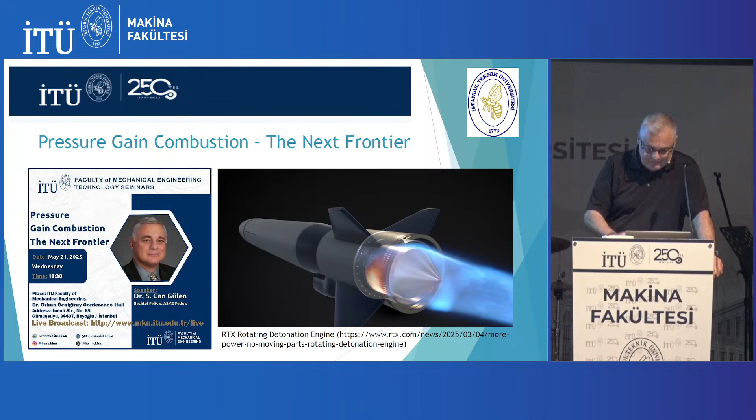So I will go through the theory a little bit. These are very complex systems, all gas turbines, steam turbines, electric power generation, jet engines, etc., etc., etc. They are sometimes mistakenly called heat engines, but they are not heat engines according to the theory. They are actually energy conversion devices. But the best way to understand such complicated machinery is using the ideal air standard heat engine cycles. They can give you 90% of the information that you need on anything when it comes to the application of a scientific theory to an actual piece of machinery.

Of course, now when you are saying heat engine, there should be a heat addition and heat rejection. As far as heat addition, there is no definition of it in an ideal cycle analysis, but when it comes to practical machinery, there is only one way to do it: combusting something, some fuel, combustion.

There are two types of combustion. One is constant pressure heat addition, ideal theory, which can be translated into practical application through deflagration combustion. Then there is constant volume heat addition, the second theoretical fundamental, which can be translated into reality through detonation or explosive combustion.

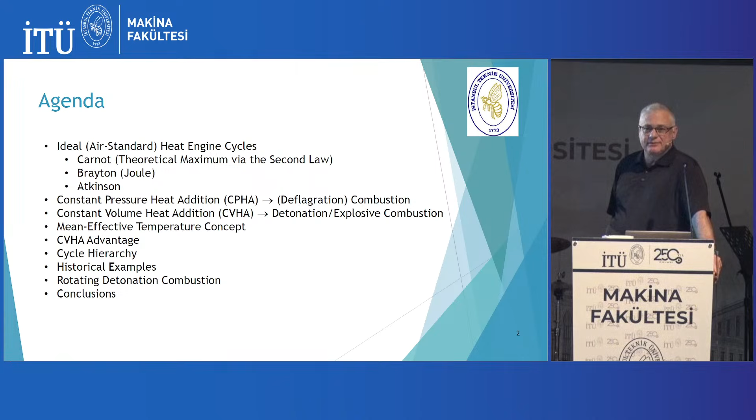Aurel Stodola. Why did these people come up with these ideas, try it, build it, run it, but went nowhere?

If you understand that, you understand the challenges, and then you come and look at the 2020s and say, okay, why can't we look at it again? Is there a point in looking at it again? Do we know something now that we didn't know then? I can answer that: no. In fact, if anything, today we know less than those greats of engineering knew at the end of the 19th century. Less. We know less.

But as far as the technology—especially materials technology, manufacturing technology, computational fluid dynamics—of course we are light years ahead. And that makes something possible. Those guys thought about it but couldn't do it. Now, sometimes we are rediscovering it again, but now we can do a little better.

Then I will talk about rotating detonation combustion, which is the final step in pressure gain combustion today. Its importance is that it's more applicable to aircraft propulsion, and especially rocket propulsion, to achieve hypersonic speeds. That's why the interest is there. But it can also be applied to land-based gas turbines for electric power generation.

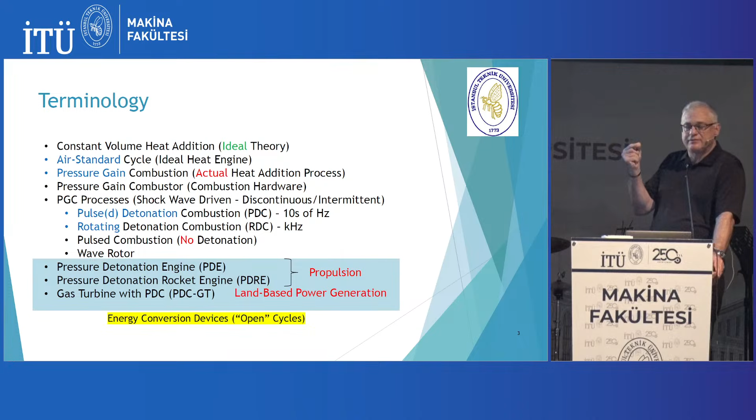Pressure gain combustion, or PGC, is a shock wave driven process. It's discontinuous and intermittent, because think about fluid dynamics and the Bernoulli equation. How can you have a flow system where pressure increases? Impossible, right? Well, there's only one possibility—refer to the gas dynamics part of fluid dynamics. A standing shock wave is the only means to have a flow with pressure increase.

Now, there are different mechanisms of pressure gain combustion. Number one is pulse detonation combustion. It's an intermittent process; the frequency is about tens of hertz, which means in one second you're having like 20, 30, 40, 60, 80 boom boom boom boom explosions. Rotating detonation combustion is an improvement on pulse detonation combustion because its intermittency frequency of creating those detonation waves is tens of kilohertz.

Okay, so it's a more smooth mechanism of achieving pressure gain and extra power. Now, there is something called pulsed combustion. The missing term is detonation.

That's something else—that's the World War II German V1 buzz bomb. I'll describe that. There's also something called a wave rotor that was brought up in the 1940s as a supercharger to be used with internal combustion piston cylinder engines. But today the interest is on pressure detonation engines, or pressure detonation rocket engines, for propulsion, and also gas turbines with pressure detonation or rotating detonation combustion for land-based power generation. Research is taking place on both fronts. Of course, the quote-unquote sexier one is rocket propulsion.

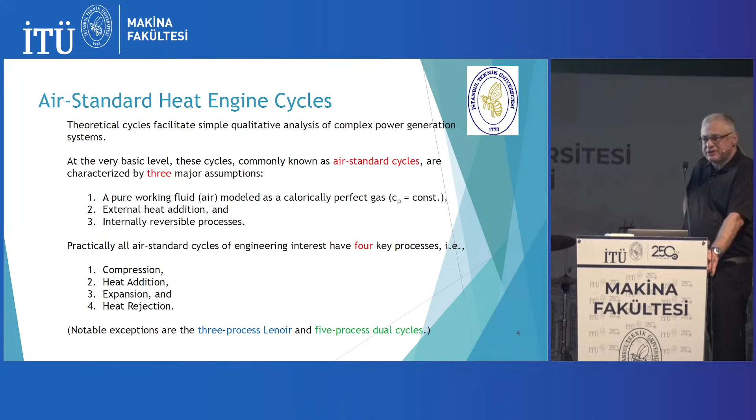There is one practical cycle, the Rankine steam cycle, where you have constant temperature heat addition. Why? Because of boiling—in the boiler you boil water, but that's only part of the total heat addition process in a steam boiler. So CTHA is of no interest for all practical purposes.

There are two other important heat addition mechanisms. One is constant pressure, CPHA, which is the basis of the Brayton cycle. The Brayton cycle is the underlying air standard cycle for gas turbines.

The other is constant volume heat addition, CVHA, which is the process in the Atkinson cycle. The Atkinson cycle is a special case of a piston cylinder internal combustion engine cycle, where the expansion stroke is extended to near ambient pressure.

There are car engines, still manufactured I think—Toyota or Mazda—based on the Atkinson cycle. So if no limit is imposed on the cycle pressure ratio, for a given cycle heat addition, the most efficient air standard cycle is the Atkinson cycle.

This is why piston cylinder internal combustion engines that we have today—not the ones in your car, but the ones produced by MAN or Wärtsilä firing natural gas to make power, 20 megawatt engines—have a cycle efficiency close to 50%. Today the best gas turbine cycle has an efficiency of around 43 to 44%.

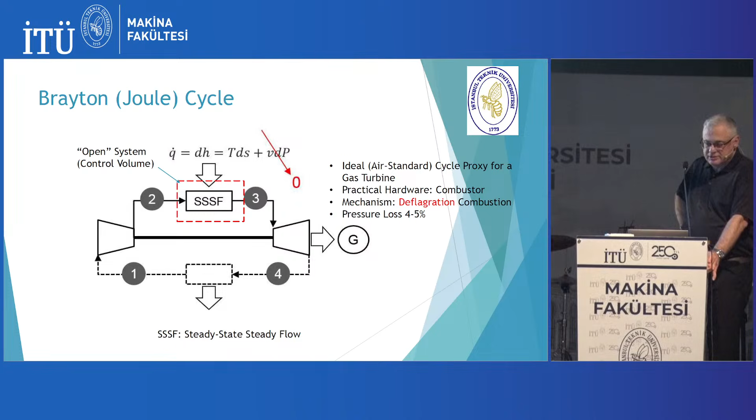The Humphrey cycle is the same as the Atkinson cycle. Humphrey in 1909 wrote a paper, which is quite interesting, called Internal Combustion Pump. And when you read the paper, which is not readable, if you spend the time and do the thermodynamic analysis on a temperature-entropy or pressure-volume diagram, it's identical to the Atkinson cycle.

Atkinson came up with that cycle named after him in 1882. That paper was published in 1909, and it's also wrong - I'll touch upon that a little bit. But anyway, here you have a constant volume process.

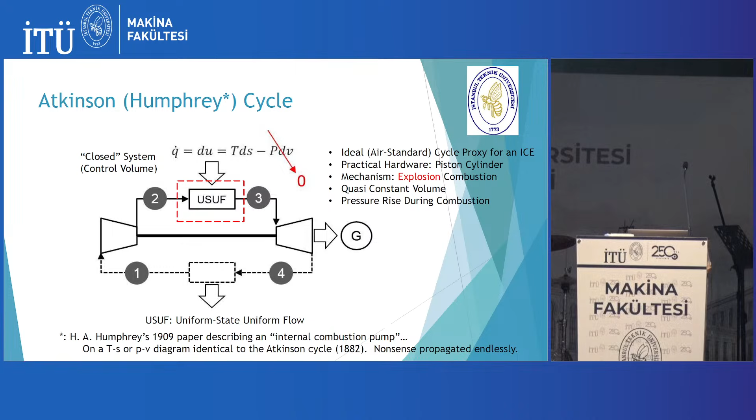Now if you have a constant volume process, and you're thinking about a gas turbine - here's the compressor, steady state, steady flow, it comes in, goes into the combustion system, which is taking place at constant volume, pressure goes up - how are we going to push that damn working fluid through that combustor?

You can't. So the process happening in the heat addition device of an Atkinson cycle - I don't want to call it a combustor - operates according to the principles of uniform state, uniform flow. It's basically a piston closed system, and by its nature it cannot happen continuously; it has to happen discontinuously, exactly what happens inside the engine of your car. So the Atkinson cycle is the air standard proxy for an internal combustion engine.

Practical hardware is the piston cylinder. The mechanism is explosion combustion - again, not detonation, explosion - so there's actually flame propagation there too, according to deflagration theory. It's quasi-constant volume, not exactly constant volume. And by the nature of the process taking place in a closed system, pressure rises during combustion - that's the efficiency advantage.

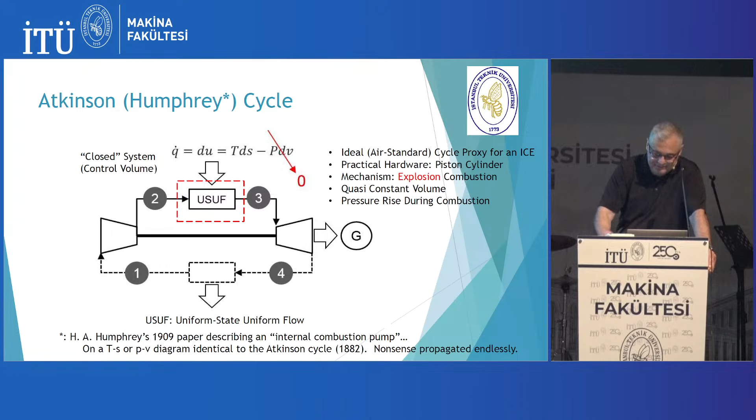Now what is the proxy for a gas turbine, which uses a steady state, steady flow heat addition device? Let's call it a combustor. Well, then the fundamental thermodynamic equation describing the process changes. It's not the Humphrey or Atkinson cycle, it's a different cycle, and I wrote a paper on it. Anyway, that's the ideal air standard proxy.

And that can take place in a device that's going to operate by necessity intermittently. Again, it's not the ideal constant volume process - it's quasi-constant volume. And again, the same thing happens: pressure rise during the combustion.

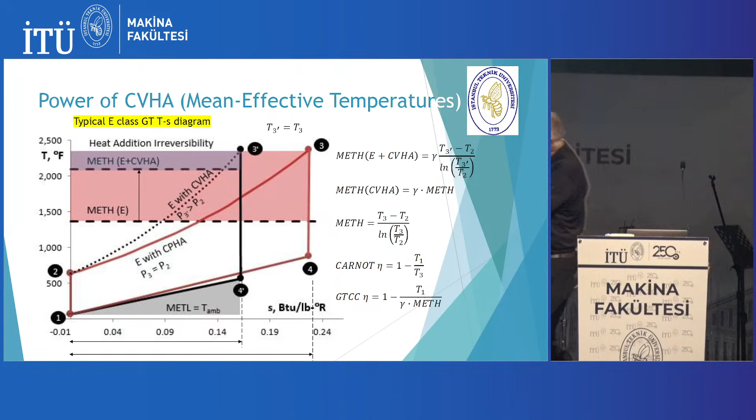So why is that important? Why are we breaking our heads over this? I don't expect you to understand this just by looking at it. Probably you won't understand it after I've described it either, but this is the fundamental thermodynamics. If you're interested in these things, this is the first thing you have to understand, so you have to work it out for yourself if this is of interest to you.

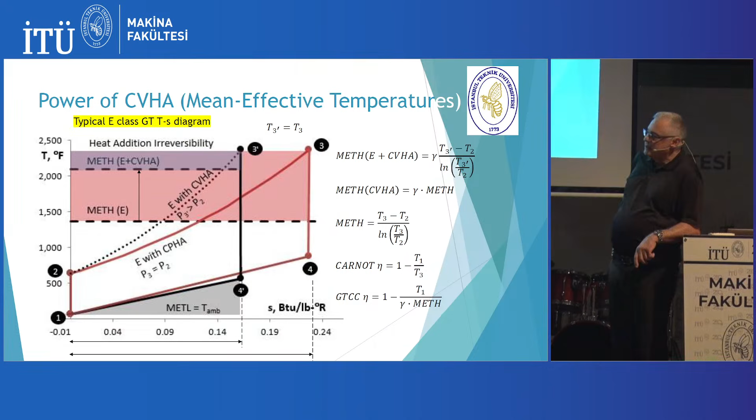So again, by the second law of thermodynamics, the maximum theoretical efficiency that you can get from a heat engine is described by a Carnot engine. The efficiency is very simple. Maybe you will remember this.

But as I said, in practice it's very, very difficult to build a cycle that's going to mimic the Carnot engine. All the engine cycles we have are poor attempts to approximate a Carnot cycle. Let's say a gas turbine. Gas turbine is a Brayton cycle. So the thermodynamic limit is 1.

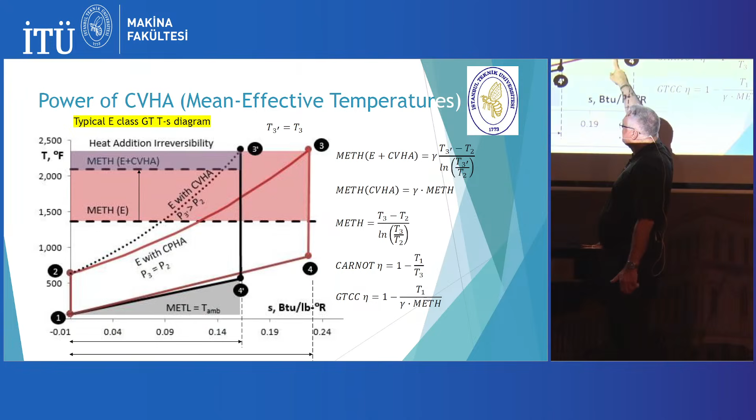Do I have the top of that? 3. And here, so that's square. That's the thermodynamic entitlement. This is the Brayton cycle for the gas turbine. You compress, transfer heat at constant pressure, and then you expand and reject heat at constant pressure again. So you can see that it is filling graphically only a fraction of the Carnot cycle area. So that's why that is the best that we can do.

But then you are looking at it and say, well, I want to analyze this cycle, but I want to stick to this formulation for the efficiency of that cycle: 1 maximum temperature, 1 minimum temperature, that's it.

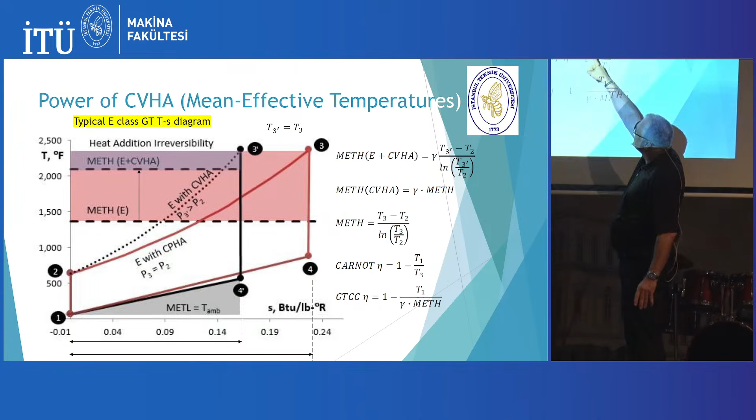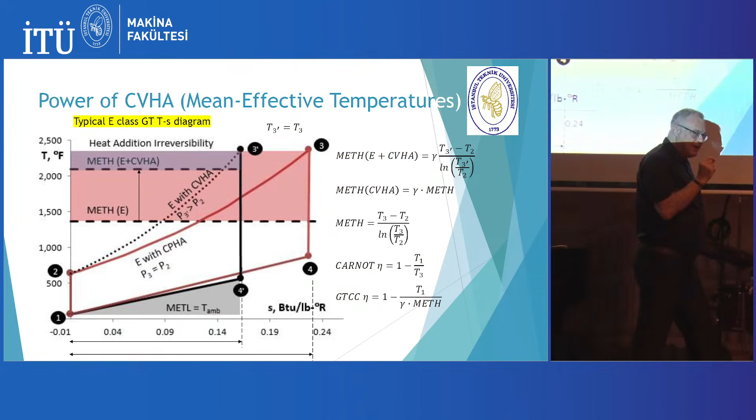If you want to do that, you have to calculate the mean effective temperature of the heat addition process. What does that mean? From 2 to 3, you are adding heat to the cycle and increasing the temperature from 2 to 3. But you can replace it by a hypothetical process with the same entropy change, but heat transfer taking place at an average temperature. That average temperature is this. It's a logarithmic average. It comes from the theory.

So therefore, if you look at your Brayton cycle, which is not even close graphically to a Carnot cycle, it becomes identical to a Carnot in shape. So then it tells you that in order to design a gas turbine cycle, you have 2 knobs: heat addition maximum temperature and the cycle pressure ratio. In order to design a cycle with the best possible efficiency closest to the underlying Carnot, what do you have to do? You have to increase that mean effective temperature of heat addition.

There are ways you can do it. Number 1, you can increase the cycle pressure ratio. If you do that, you can visualize even here that the Brayton cycle is going to basically compress. So the mean effective temperature is going to be, and also the mean effective low temperature, going to be very close to the isothermal limits of the Carnot.

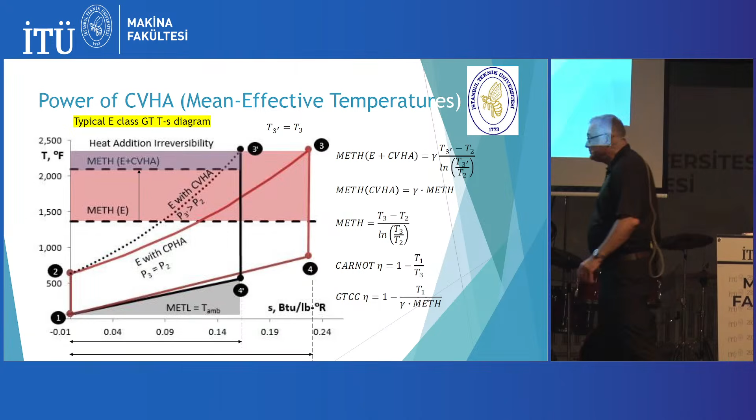Or you can have reheat heat addition, which I don't show here. And one other mechanism is pressure gain combustion. What do you do? You have the same compressor, but instead of a constant pressure heat addition, you go to constant volume heat addition. And you again target the same cycle maximum temperature.

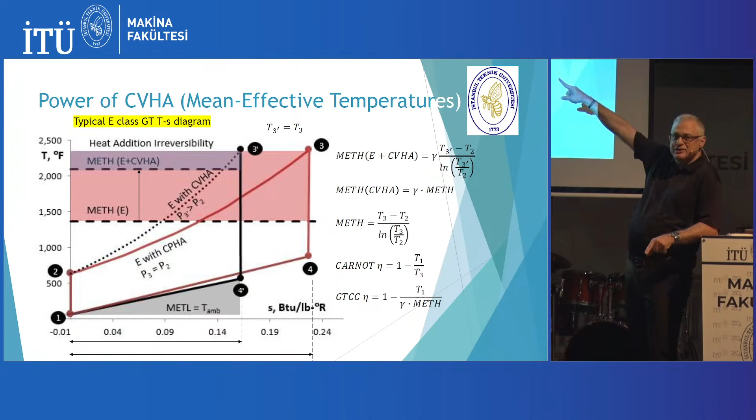But what happens now is, what did you do by doing that? On top of what you got from your compressor, you added pressure increase. So you have a much higher mean effective heat addition temperature now, which is much closer to the ideal Carnot limit. By doing that, you are increasing, on paper, on an ideal air standard basis, the efficiency of your cycle.

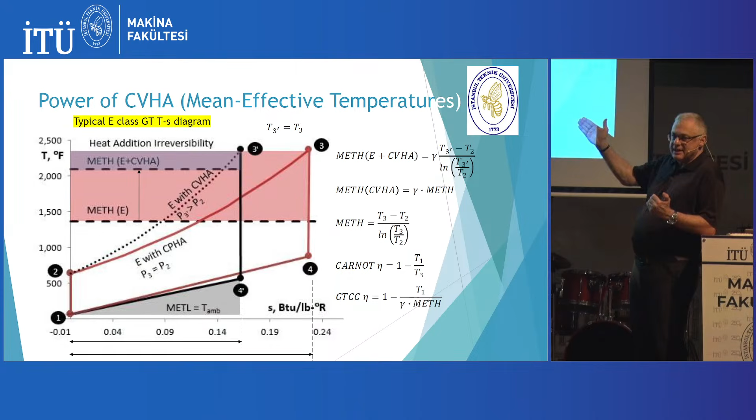So I'm not going to belabor this more, but in one sentence: pressure gain combustion increases the mean effective heat addition temperature of the cycle tremendously. Now, of course, in reality, you are not going to get that big bang for the buck with the hardware that you have, but I will show you some numbers. You can still get a very appreciable efficiency improvement.

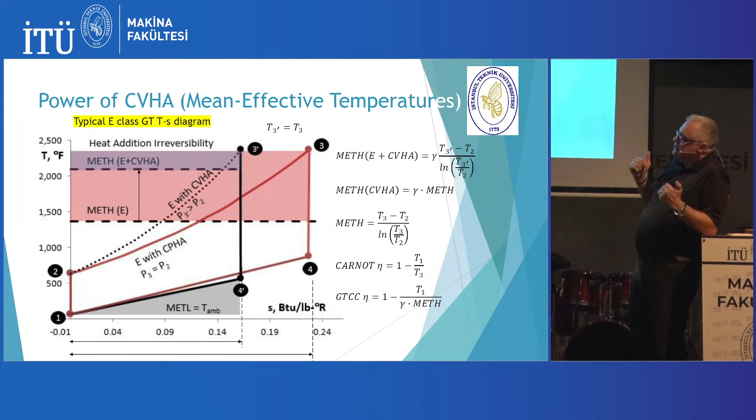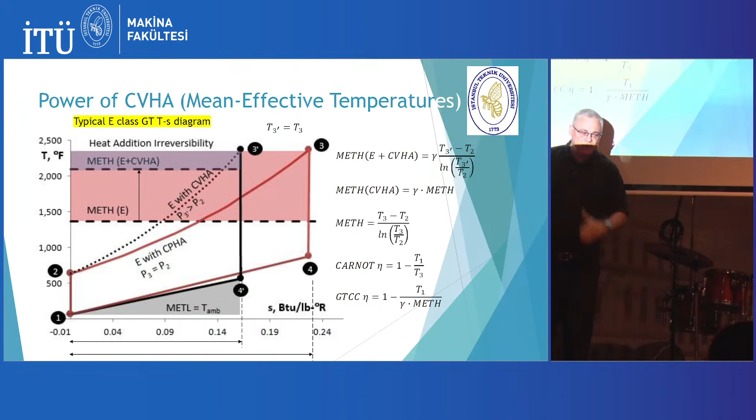So that's the driver. Another way to understand, graphically, at a very quick look, the advantage of constant volume heat addition is this reduction in the entropy generation. This is the original Brayton. This is, I don't know if you can see it, but constant volume heat addition. You reduce the entropy generation, and in layman's terms, if you reduce the entropy generation in any process, you increase the efficiency of it.

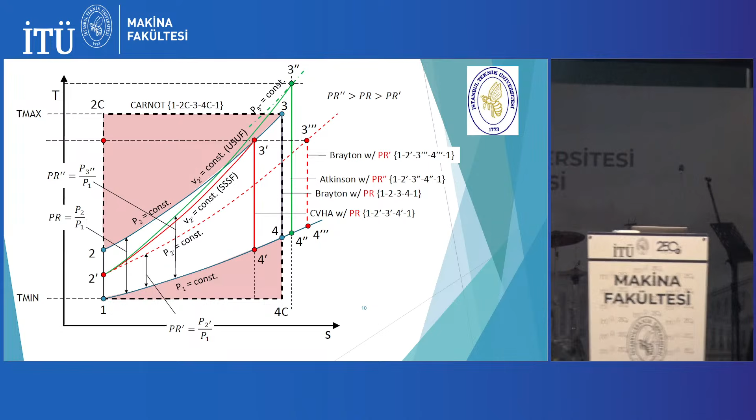So this is the cycle. Again, this is a very busy diagram. All I want to show here is, if you have a heat source or limit of heat addition determined by temperature at point 3, your maximum heat engine theoretical efficiency is that Carnot efficiency of that square. This is how the cycles stack up in terms of efficiency, how you can fill that box graphically.

Okay, and then the quick takeaway is that you have to either go with Atkinson or you have to go with CVHA.

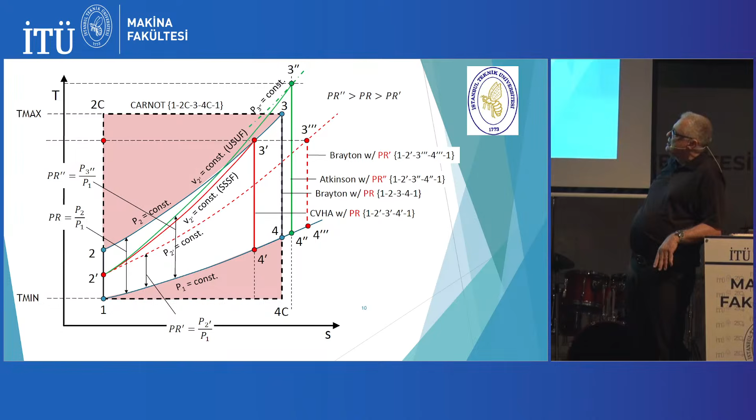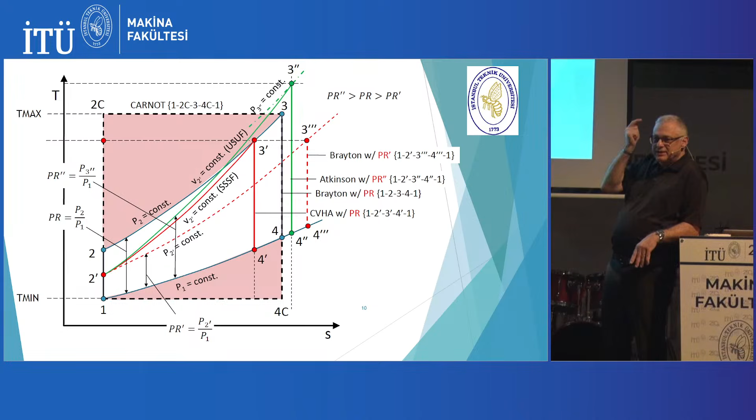Anyway, I put this here to illustrate that there is a lot of fundamental work, and to do these calculations, once you sit down and go through them, they are easy, especially with the ideal air standard assumption and the perfect gas. But you have to do these calculations not only formulaically, but also numerically, so that it hits you that this is what's happening. And I'm telling you, there are very, very few people today who can do this properly. It's a sad fact.

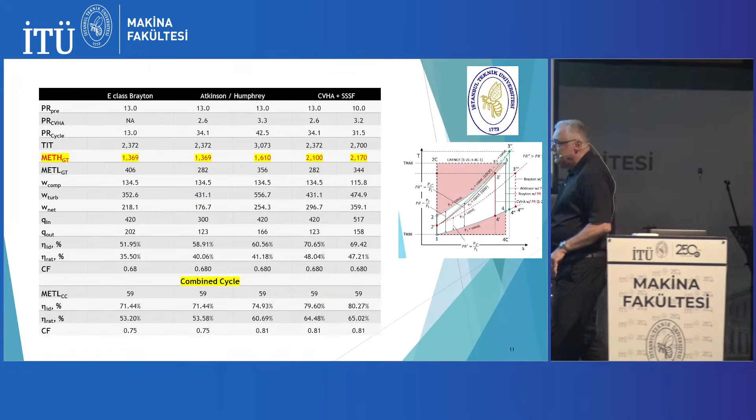So these are some numbers. E-class. Heavy-duty industrial gas turbines used for electric power generation are classified according to their turbine inlet temperatures. E-class is the old technology from the 1980s. In the 1990s, the technology evolved to F-class. E-class was around 1200, 1300 degrees Celsius turbine inlet temperature.

In the 1990s, General Electric first, and then all the other major OEMs, introduced F-class, 1400 degrees Celsius turbine inlet temperature. In early 2000s, GE introduced H-class with steam-cooled turbine, 1500 degrees Celsius. And in 2011, Mitsubishi introduced J-class with 1600 degrees Celsius turbine inlet temperature. So this is the classification.

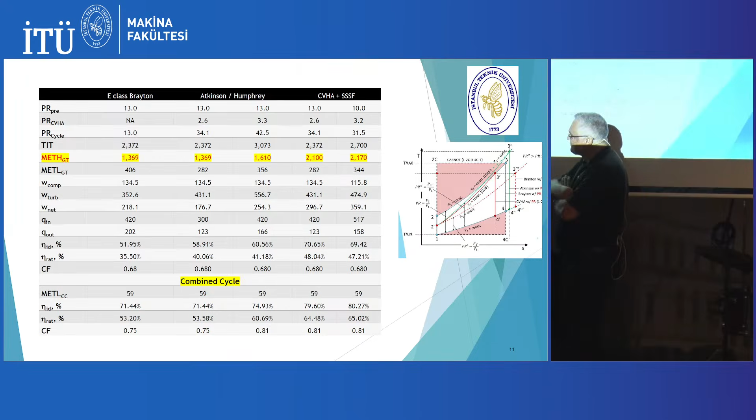So I use E-class as an example, which is an archaic technology. It's still being used. It's a workhorse, very mature technology, very dependable technology. It's actually used widely in syngas applications, refinery applications. It has low efficiency, but it can be improved tremendously with pressure gain combustion. So that simple cycle is about 35.5% efficiency, nothing to write home about.

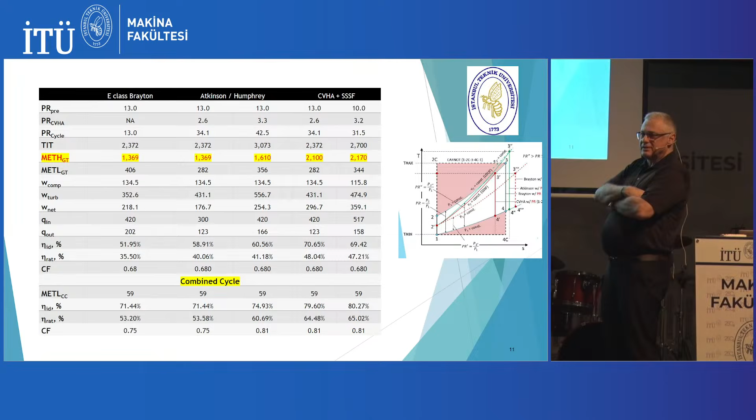As I said, modern machines today can reach 44%. And if you do a combined cycle—anybody need help with the combined cycle theory? Okay, well, let's do it. I don't know, it's included in the price of admission.

So if you look at that Brayton cycle, you see that triangular area that can be used to generate extra power. Instead of rejecting the heat of the exhaust gas at T4 to the ambient, you can use it in a boiler, called a heat recovery steam generator, to make steam, which you can use in a steam turbine to make additional power. From an ideal cycle analysis perspective, that 1, 2, 3, 4 Brayton cycle becomes 1, 2, 3, 4C and 1. So you cover a much larger portion of the original Carnot.

So if you do that, an E-class Brayton cycle, combined cycle, is 53.2%. These are rating numbers, so it's again, meh.

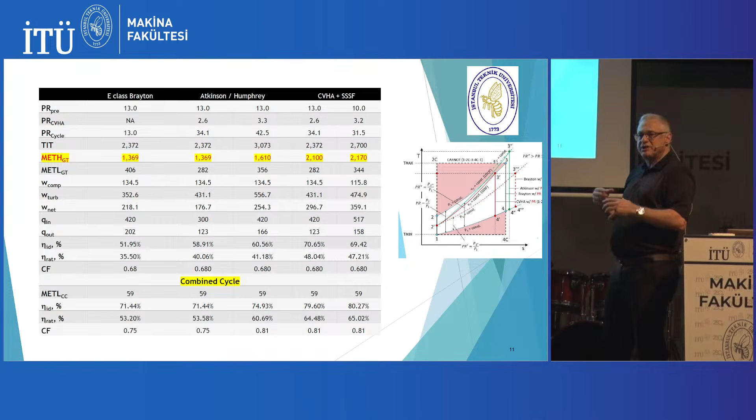So this is what you can do if you say, okay, I'm going to take away the combustor of that E-class gas turbine, and replace it with a pressure gain combustor. If you do that, and keep the same mean effective heat addition temperature, you're not getting much impact.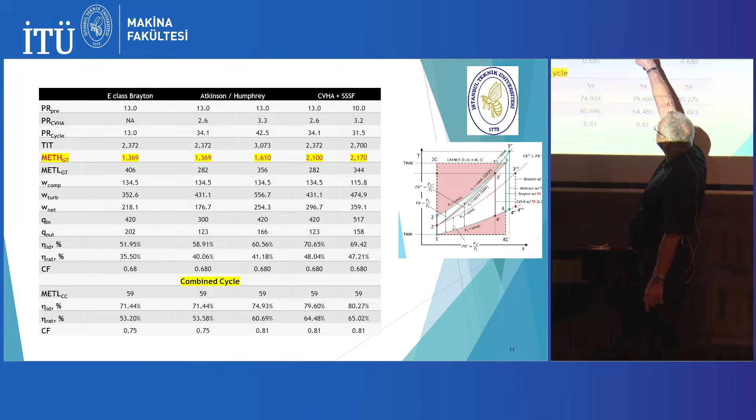But by doing the CVHA—oh by the way, look, TIT did not change. Now you change the TIT, use pressure gain combustion, your mean effective temperature is much higher. Now you get 60.7% efficiency. That's entitlement, okay? Which means this is the Humphrey, and this is the CVHA, even higher, if you can do it right.

And this is the Carnot factor. Carnot factor is the ratio of the actual ideal cycle to the Carnot cycle efficiency. That 0.75 is a very, very important number. Today in the energy field, especially in prime movers, that Carnot factor hovers around 0.75. So after one century of development, we've kind of hit a plateau. Whatever we do in terms of design, playing with pressure ratios and turbine inlet temperatures and whatnot, we are getting around 0.75.

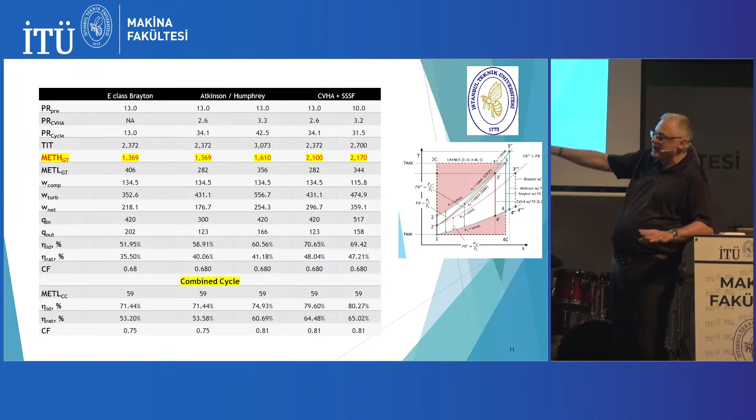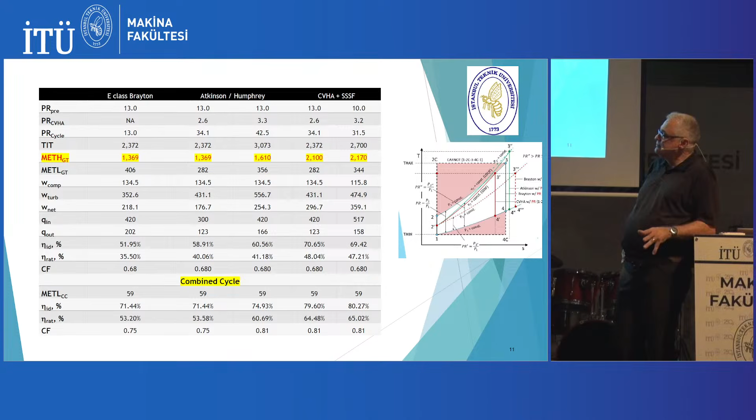And that's—the data is in my books and papers. I didn't publish it here, so if you're interested, you can look it up. I found out on my gas turbine engineering—my gas turbine book is available on Scribd as a PDF, free. People pirated it, so you can download it and look it up. Data is there. 0.75 is a very, very solid number.

So which means that as an engineer—and this is practically what I do—some mad inventor comes to you and says, 'Hey guys, I have this invention which is going to give you that efficiency.' Okay, you can immediately check it. So, what is your high cycle temperature? All right, if you had to build a Carnot engine...

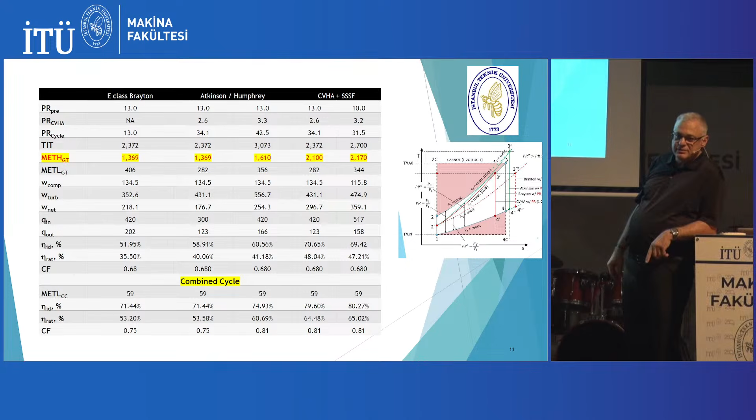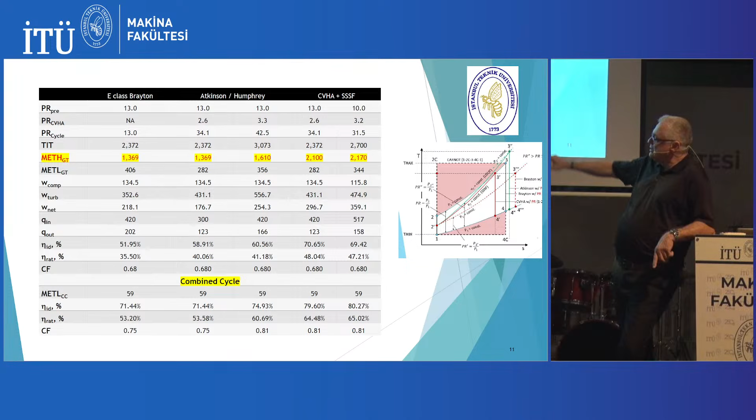Carnot engine—if you built it, and there are many who claim it, let's say you have done it. Multiply by 0.75, that gives you a very good estimate of what you can do with technology available today. This constant volume heat addition with steady state, steady flow system can give you a significant jump from 0.75 to 0.8, and the efficiency can hit 65. So the potential improvement is from 53 to 65, 12 points.

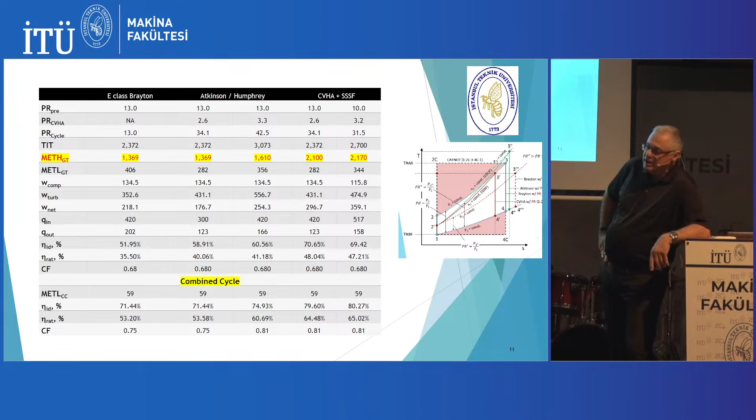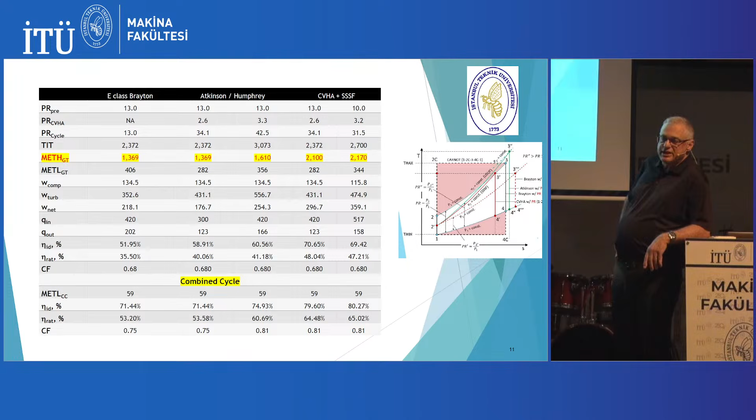The reality is, I'll show you. If you take all the non-idealities available in the hardware, maybe 3 or 4 percentage points, which is still huge. That's why pressure gain combustion, especially pulse detonation combustion in the 2000s, was quite hot and under investigation to improve the power generation cycle efficiency.

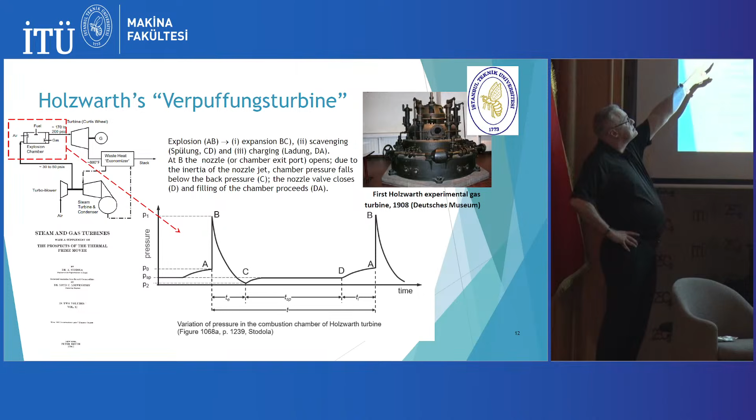Now, even more interesting, this is a combined cycle. 1905, 1908—the guy designed it. What do you do with the 800 degree Fahrenheit exhaust from that gas turbine? He took it, put it through a heat exchanger, made steam. That steam is sent through a steam turbine, and that steam turbine is driving that turbo blower. There is your combined cycle, 1905, 1908.

When did we start in the United States and Europe seriously pursuing combined cycles for electric power applications? Late 1960s. You see?

Now, can you find another Hans Holzwarth today? Not a chance. I told you, they can barely do four basic operations in math, that's all. I can today send this to all the universities in the United States and Europe—hey, take a look at this, describe to me what's happening here. I would say the successful reply rate wouldn't go beyond 10 to 15%. Well, anyway, the guy did it.

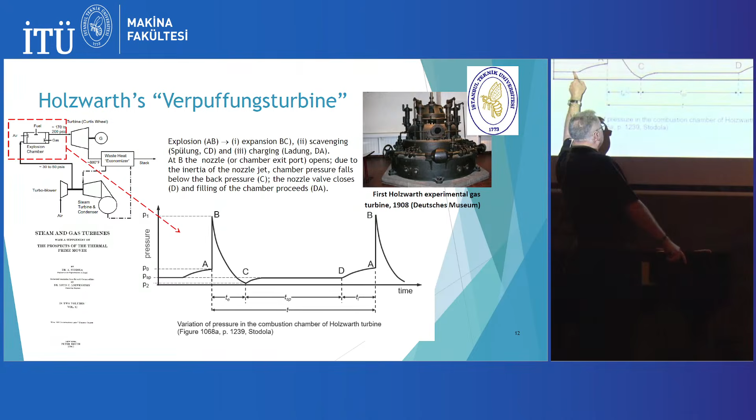And this is the intermittency. This process, by nature, is not continuous—compress, squeeze, close the valves, boom, open the valves, purge, repeat. So that frequency determines how well this intermittent process mimics a steady state process. You have to basically squeeze that time. If you do it like Holzwarth did, it's like poof, poof, poof. But if you improve on it and do it at a high frequency, it becomes continuous—that is pressure gain combustion.

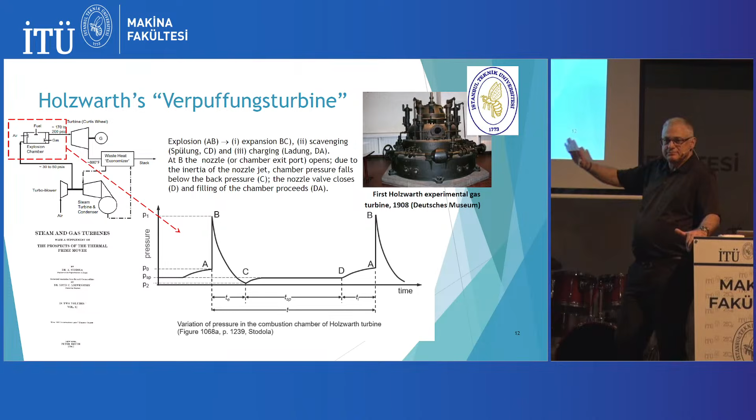1944, Germany is under attack. Russians are coming from the east, Americans from the west. Hitler is running out of men, and all the engineers and highly skilled technicians in German companies are called to fight on the Eastern Front. How are you going to protect those guys? Well, one way was coming up with bright ideas like these and making them work on that. Believe it or not, that was one of the main reasons behind German supremacy in wonder weapon production and development in the Second World War.

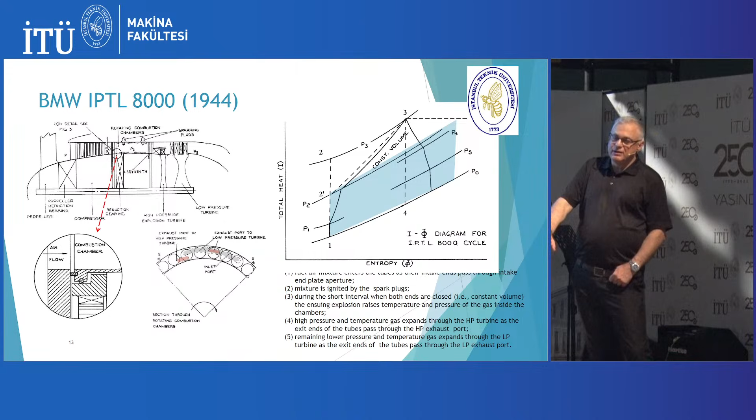Now, around the turn of the century, Germany was by far the most highly educated nation in the world—not even close, not even close to the rest. The country was teeming with Herr Professor Doctors, applied scientists, not run-of-the-mill engineers or garage tinkerers like Edison. Edison is nothing—he's a garage tinkerer and mostly a charlatan, but who was laborious and a good salesman.

And of course, if you try 10,000 stupidities, you are bound to hit something smart at some point. Germans were not like that. Everything came from the theory first, and then they came up with very interesting stuff.

The most well-known is maybe the first jet engine. They designed it, built it, and used it in the war. And then their Walter submarines. They even tried to put gas turbines into tanks, on which I am working on a book right now.

But the main thing under those crazy ideas was to keep the engineers working. And they were lucky, because Nazis were stupid and evil people, but especially Himmler. Himmler was fascinated by harebrained ideas of wonder weapons, and he took over the technological development under the aegis of the SS and created employment for these people.

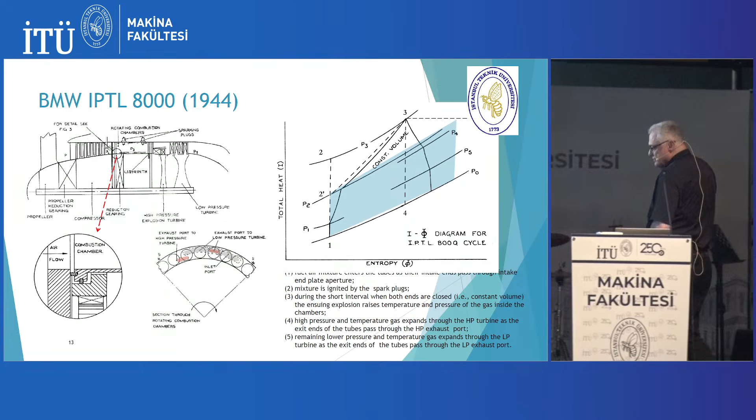And soon enough, of course, if you have so many Herr Professor Doctors who are very well versed in thermodynamics and stuff, okay? A German engineer from the 1940s, if you want to compare them with today's engineers, it's a laughing matter. It's not even a laughing matter. These guys are something. And they came up with this jet engine.

It is called IPTL 8000, developed at BMW, and it's basically a pressure gain combustion engine with a rotating combustor. And why rotating combustor and tubes? Because, how do you, this is an engine, a steady state, steady flow device, which is going to power an airplane. They want to increase the efficiency over what they have at that time.

The Jumo 004 engine of the Messerschmitt 262 was around 14% efficiency. With this one, they could get like 26% efficiency. I mean, beyond a quantum leap. And the theory is exactly the same that GE did in the 2000s, I will show you.

Rotating tubes, closing and opening valves synchronized with the rotation: the tube closes, ignition, detonation, combustion, valve opens due to the rotation, goes to the turbine, boom. The cycle is basically that CVHA cycle.

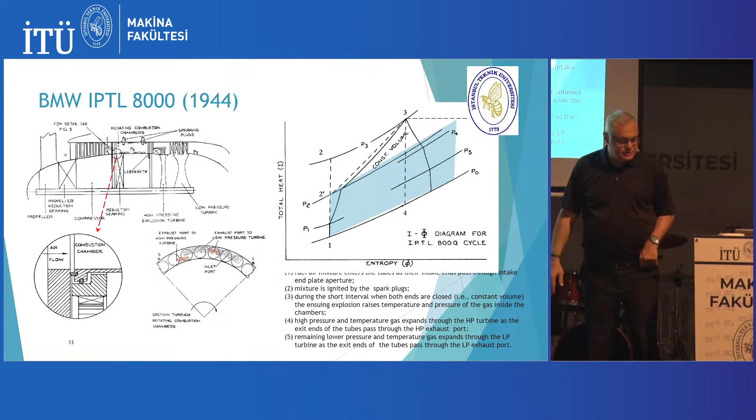And I did the calculations. It's in my book on German World War II superchargers, it's a very interesting book. If you are interested in those kinds of things, I describe it there also, did the calculations, and yeah, it holds. This is a 26% efficiency engine. By the end of the war, they were able to build the test stand, but they couldn't run it. Maybe they ran the combustion, but not the full engine, and then the Russians came.

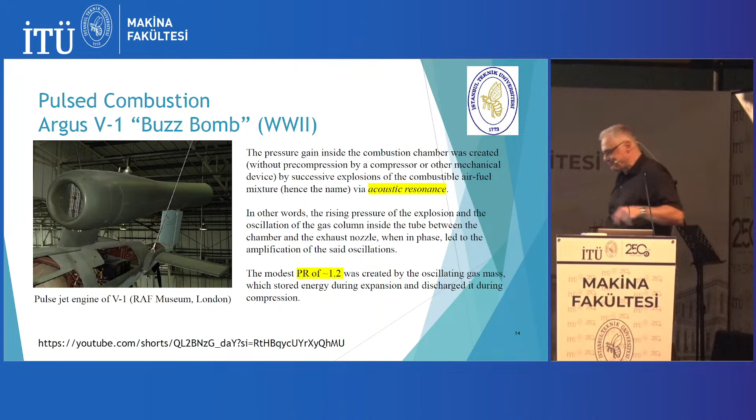And, I think they burned the documents and whatnot, so this is what's left. Now, this is pulsed combustion, not pulsed detonation combustion. I'm just going to describe it to you. This is the V1, the German V1 engine.

British know it as the buzz bomb. Why? Because of the noise it makes. Remember what did I tell you? Holzwarth's Verpuffungsturbine is what? Puff, puff, puff, low frequency.

In this one, the valves that you are seeing at the front of that engine open up very quickly, okay? So instead of puff, puff, puff, you have a rapid cycle, and on that machine, when it's flying and coming close to you, it makes that terrifying noise, and that's why they call it the buzz bomb.

What's happening here is basically valves are opening and closing, admitting air because the missile is flowing forward; air is coming in, fuel injected, valve closes, ignition, and then from the tube back, that hot gas is going and pushing the gas forward. The pressure ratio, pressure gain, is very modest, about 1.2, okay? Because the combustion inside that thing is not detonation combustion, it's still deflagration combustion.

And there's also this acoustic resonance that's happening in that place, in that room. It's a very simple engine. I highly encourage you to go to YouTube and look at modern V1 engine replicas to see how it operates. Very interesting. Just by watching them, you will understand many of these concepts, at least visually.

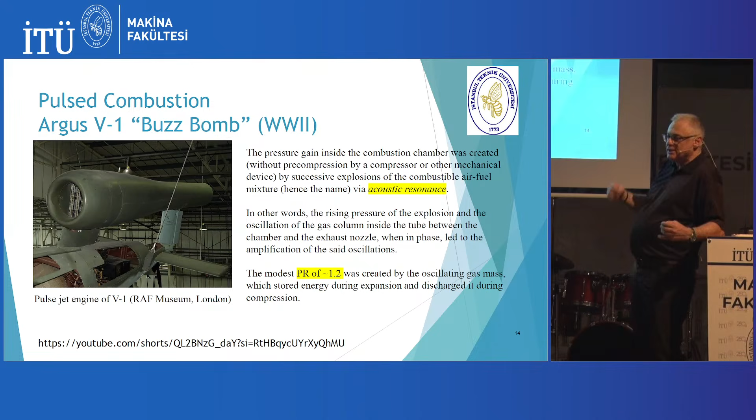Turbo compound engine, Napier Nomad. After the war, Americans and British, of course, they also developed their own jet engines to be used in military aircraft. Of course, Russians did also.

But even in the 5 years after the war, there is still a debate going on about which is going to be better, especially for military aircraft applications as a propulsion system, because there was one drawback of the gas turbines of the time: they were very, very inefficient, consumed a lot of fuel. So for a while, at least 10 years after the war, they looked at improving the fuel efficiency of the piston cylinder engines.

And one outcome of that was the Napier Nomad by the Brits. What's happening here is the main machine is a diesel engine, standard, but it's using this contraption here.

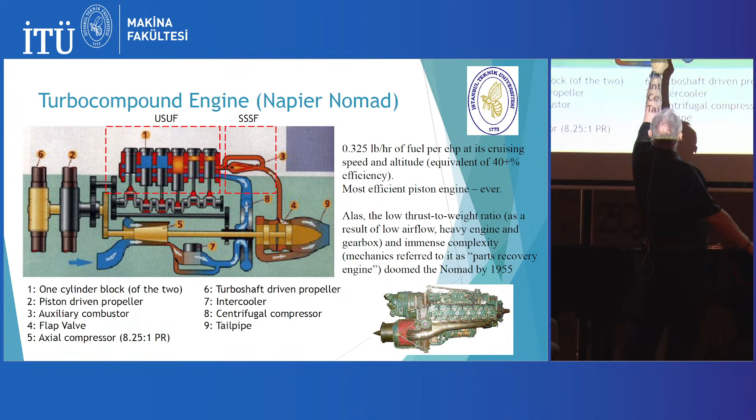Air coming in goes through an axial compressor, intercooler, centrifugal compressor, and that charged air is coming into the cylinder. So this is supercharging or turbocharging. Then high temperature gas coming out of the exhaust of the cylinder bank, instead of going out, goes through a second combustion chamber, number 3 over there, and then through a turbine, making extra power. So this is called turbo compounding.

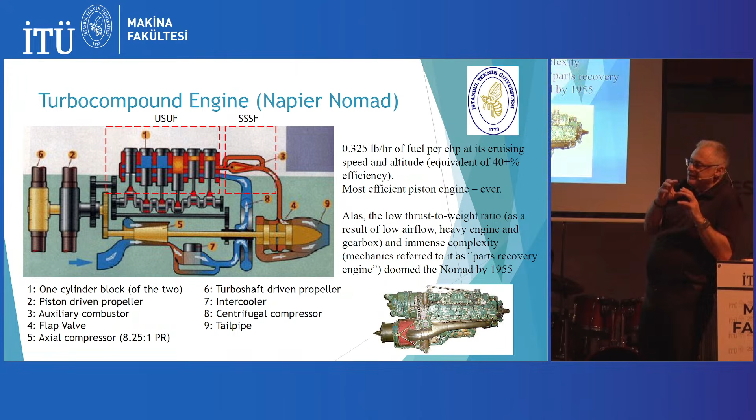It's also a way of increasing the cycle pressure with combustion. It was a very efficient engine, and actually it's still the most efficient piston engine ever, but it was very complicated and very heavy, and therefore it could not compete with the gas turbines, very lightweight engines. So it just died away, but the technology, turbo compound, you can look it up. I think it's still being used in some truck engines.

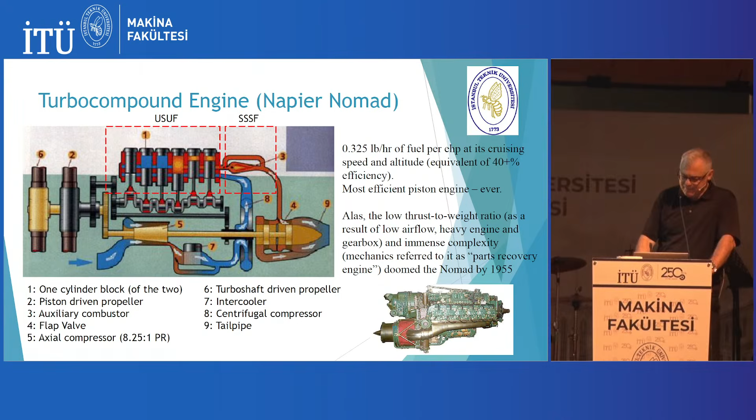Now there is also the wave rotor, known under the name of the Comprex, which was another way of supercharging piston cylinder engines. It is closer in spirit to detonation engines because the pressure addition to the charge air of the engine takes place in that rotating annular scheme, via shock waves and expansion waves.

Because just like that German BMW engine that I showed you, that thing is rotating in the middle - in this case no gas turbine, but in that case it was rotating between the compressor and turbine and creating that pressure by firing. Here it's again by the opening and closing of the valves, and for a moment both streams are trapped inside that rotating thing, from the hot, high-pressure gas to the low temperature, low-pressure charge air. Pressure is transferred through the shock waves.

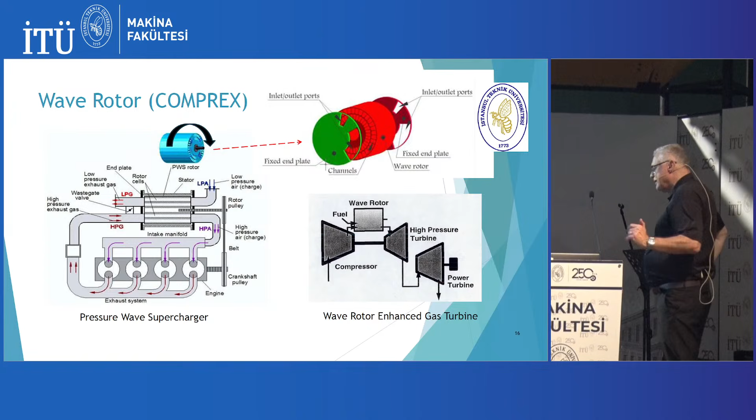So it has been tried, it has been applied. I think it's still being used, as I said - I'm not sure, Mazda or Toyota, you have to look it up. But that's another example of pressure gain, and it can be turned into a pressure gain combustor.

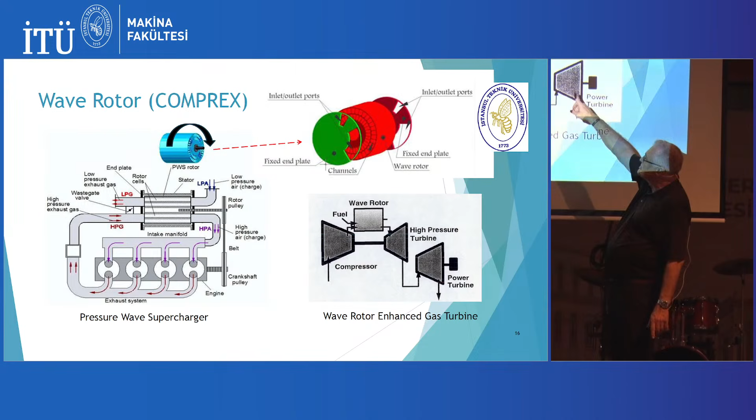So instead of this engine supercharging, you put the thing between the compressor and the turbine and inject fuel also inside and fire it inside that thing. So this is a wave rotor enhanced gas turbine idea. It didn't go anywhere because the pressure ratio, pressure increase of the wave rotor is also weak, so it doesn't give you that oomph that detonation can give.

GE, in the 2000s - this pulse detonation combustion idea goes back to the early 1950s with an interest in aircraft propulsion, but didn't go anywhere, was dropped. In 2000 again, especially with interest from military research agencies in the United States, they started looking at it, and GE looked at it, with an eye to application of this pulse detonation combustor to a gas turbine.

Tests were done, they were successful, but pulse detonation is a very, very difficult thing to do in aircraft engines because of vibrations. As I said, the frequency is very low, so it goes like bum, bum, bum, bum, bum, bum, bum. And it also has very detrimental impact on the turbine downstream because of that intermittent nature of the flow. But anyway, it was done and forgotten.

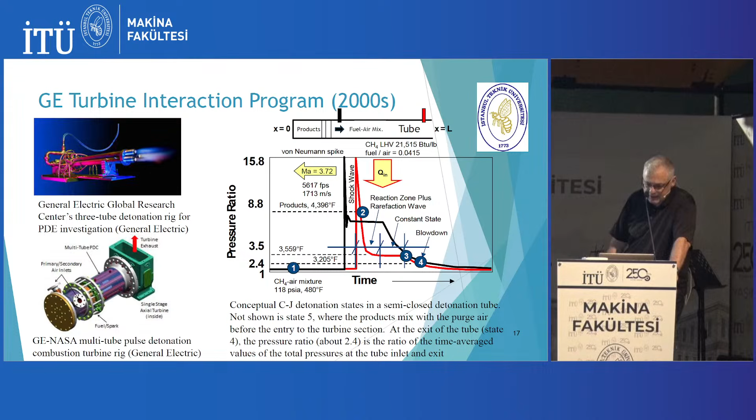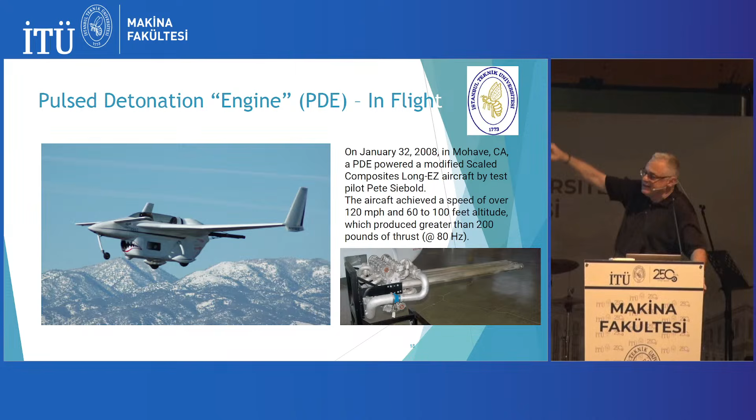And it achieved some modest success. There was no other actual application. The frequency of the detonations was 80 hertz, which means that in 1 second, 80 detonations took place. You can read about it.

And this is what it can do to a gas turbine. This is a J-class machine, one of the most advanced gas turbines out there. At the time I had done the calculations, the reported efficiency was 41.5%. If you equipped a pulse pressure gain combustion, basically a pulse detonation combustion, you can increase the efficiency of that machine to about 49.1%.

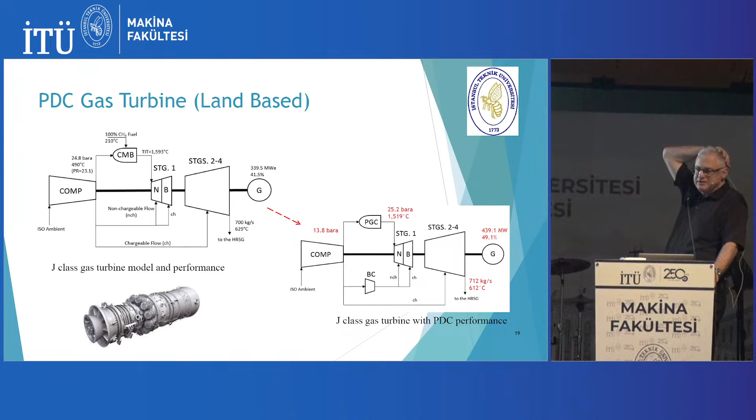This is more or less a realistic number that I had done when I was at GE, based on the findings of the research done there. So this is going to give you an 8 percentage point improvement in simple cycle efficiency, which is going to translate to about maybe 3-4% in combined cycle.

So that's a big gain. If you have a 61% combined cycle with this J-class gas turbine, you can easily achieve 65% if everything works out, but the research was stopped, nothing.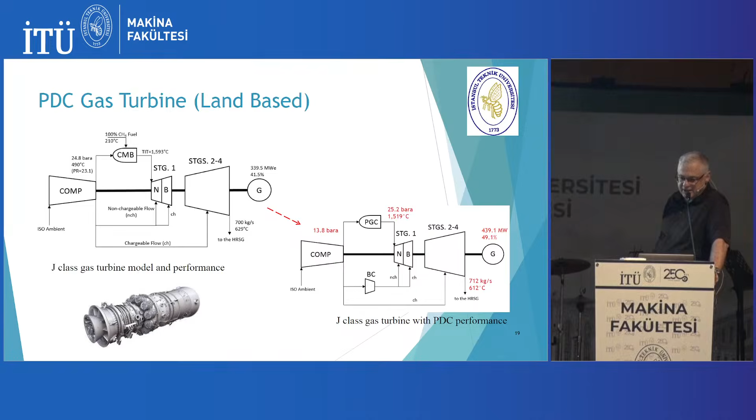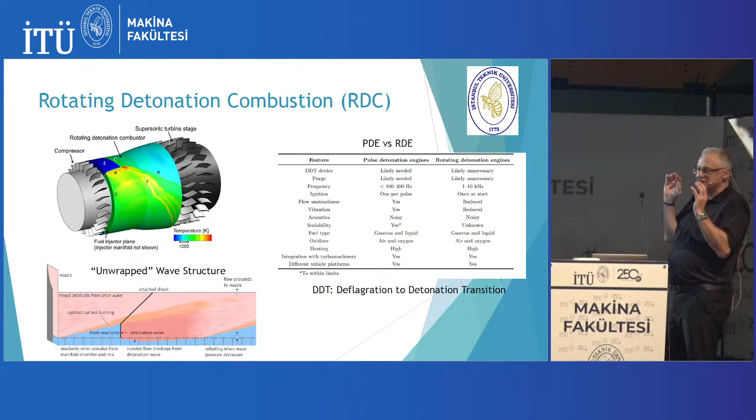And then recently, rotating detonation combustion came. You can see the comparison of pulse detonation versus rotating detonation combustion and engines. As I said, if your focus is aircraft propulsion, PDC has very low chance. It has a lot of problems, and the root of the problem is the low frequency. Rotating detonation is the same mechanism, detonation combustion, but the frequency goes from that flying example's 80 hertz up to rotating detonation engines reaching 10 kilohertz, giving more efficiency, smoother flow, and a closer approximation of a steady state, steady flow process.

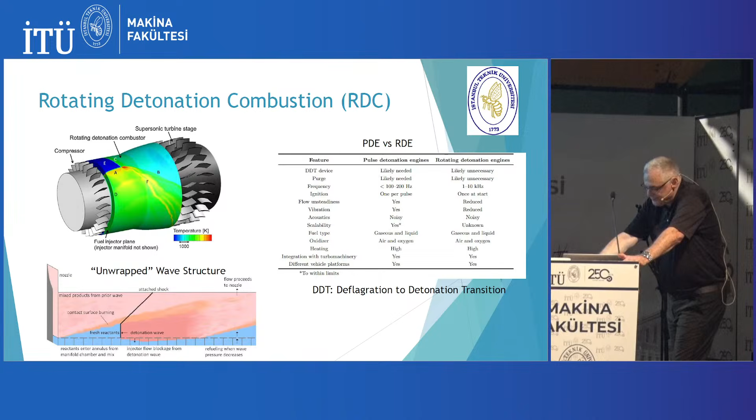This is the research that is going on heavily right now, and the focus is especially to make it, since an aircraft jet engine is difficult, into a rocket engine. When you make it a rocket engine, just like that prototype flight engine with the PDE, there is no turbine. You just get the thrust from the rotating detonating combustor much, much easier.

And there are companies funded by venture capital. Also, there is military research going on for hypersonics. This rotating detonation combustion can be used either as-is for a missile as the main engine, which may or may not be feasible, but the real interest is in the ramjet version.

You know what a ramjet is? There is no compressor. The compression of the air happens during flight by the forward speed, Mach 3, Mach 4, whatever speed the engine is at. So you just fly, and this is how the Pratt & Whitney engine of the Blackbird SR-71 works at high Mach number flight. It changes from a gas turbine to a turbojet to a ramjet.

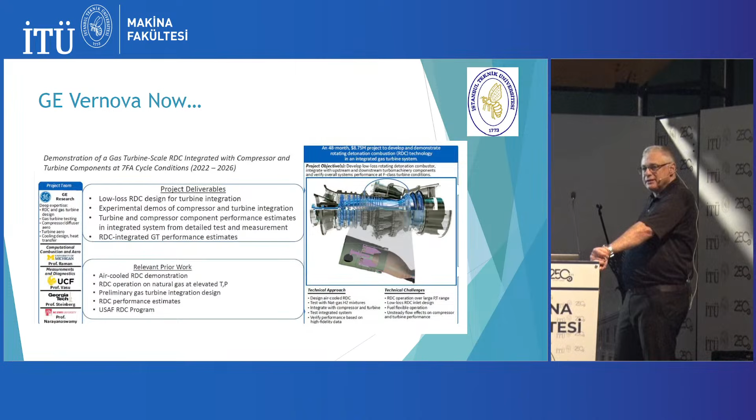It's not guaranteed that it's going to go anywhere. Over 100 years, I gave you many examples of pressure gain combustion ideas and applications that came and went, and didn't end up as a commercial, successful product. This may also be the same, maybe some super secret hypersonic missile from Chinese and Americans, I don't know, remains to be seen. But at least from a fundamental thermodynamic perspective, it's a worthwhile idea. If it can be pulled off, fine. If not, maybe it can get you a PhD.

And GE restarted the same thing. In 2010, they had dropped looking at the gas turbine with pulse detonation combustion. Now they are restarting to do the same thing with rotating detonation combustion. They are working with funding from the Department of Energy and with partners from universities and others to take an old F-class engine, remove its existing combustion system, and replace it with an RDC, and test it to see if they can pull it off. If they can, that's going to be a very important thing.

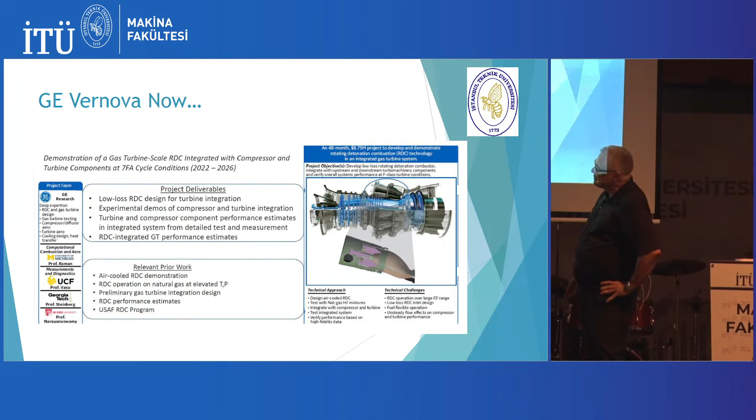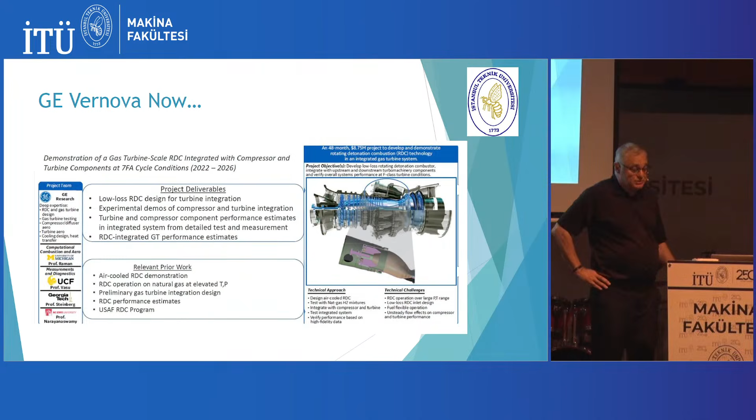For electric power generation, again there are no guarantees. It's very difficult. There's a lot of R&D that needs to be done, and it can fizzle again very fast because these are very capital-intensive applications. Developing a new gas turbine engine today, not going overboard on technology, is a $500 million to $1 billion investment. So it cannot be done easily, and this is going to be even more than that because of the new technologies.

And the concluding remarks: it's an old concept, pressure gain combustion, going back 100 plus years. It has been implemented in many variants, I gave you some examples, but they did not make it to the mainstream. It has significant gas turbine cycle efficiency boost potential, so it's going to be quite important, especially in the current climate of decarbonization. Anyway, getting efficiency to burn less fuel and make power is an important thing.

The current research focus is rotating detonation combustion. A lot of work needs to be done. There are applications in propulsion and electric power generation, and significant R&D and funding is underway. So as I said, for those of you interested in this particular area of mechanical engineering, it might be a good area of graduate study.

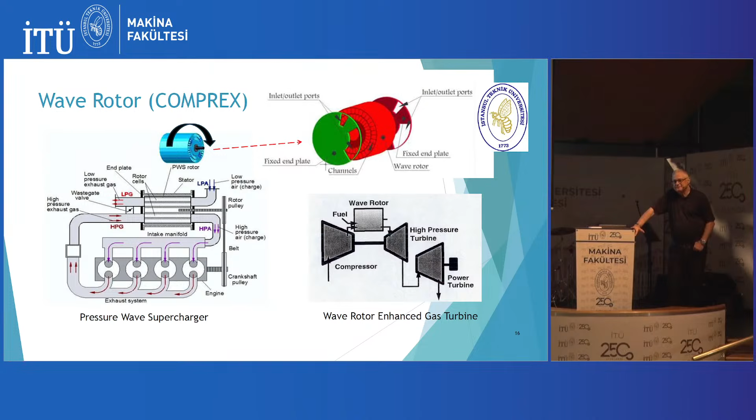Bazen bir yere gidiyor, bazen bir yere gitmiyor. Yani bu işler böyle. Bilmiyorum anlatabildim mi. Ama demek istediğim, çalışacaksınız arkadaş. Öğreneceksiniz ve zaman geçecek. 4 seneyi birlikte otururuz, 4 senelik okuldan sonra hiçbir şey olmazsınız. Ben de olmadım. Olamaz, bu kadar information load olmaz. Ne yapacaksınız? Oturacaksınız, çalışacaksınız. Graduate study yapacaksınız. Graduate study'nin sonunda bile olmayabilir. Yaptığınız işte bunları şey yapacaksınız.

Önünüze bir şey geldiği zaman tamam, okey ne yapıyorsun? Ben sabah 9'da işe geliyorum, bana bir şey veriyorlar. Onu yapıyorum, 5'te çıkıyorum, gidiyorum. Olmaz. Anlayacaksınız, bana bunu verdiler, niye böyle yapıyoruz? Şunu şöyle yapsam olmaz mı? Bunun altında ne yatıyor? Onu yaptığınız zaman zaten siz de anlamaya başlıyorsunuz. O zaman kendiniz bir şeyler katmaya başlıyorsunuz. Kendiniz bir şeyler katmaya başlayınca tabii sizin şeyiniz artıyor.

Değeriniz artıyor. Merak etmeyin, değer verirler. Türkiye'de verirler mi vermezler bilmem. Orada da zor ama kendinizi ispatlarsanız verirler ve değer verirlerse bir yere gidersiniz. Şimdi diyebilirsiniz, ne anlatıyorsun hoca, ben okulu bitireceğim, işe başlayacağım, evleneceğim, bilmem ne yapacağım falan, bana para lazım, cart curt. Okay, well, that's a different track. Ama kafanızı ona takarsanız you become an expendable person. What does expendable mean? Her sene, Amerika'da genellikle 5 senede bir, 10 senede bir bu işler çıkar. Research başlar, paralar gelir, çalışılır, research kesilir, paralar gider. Hadi bakalım herkesi kapının önüne. Kimi kapının önüne koyacaklar? İşte böyle düşünenleri.

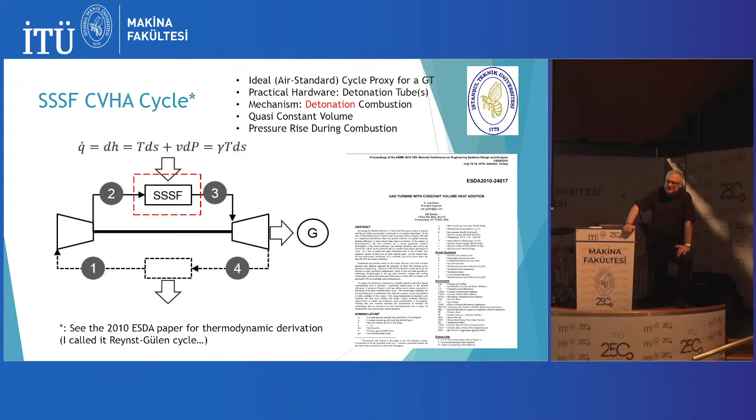Yapıldı. Bak sana söylüyorum, sen diyorsun ki ukala, içinizden ne geçtiğini biliyorum. Ukala herife bak falan. Bakın, bana her hafta 10 tane en azından paper review request geliyor. Utter garbage. Utter garbage. 8'ine hiç benim işim değil diyorum. 2 tanesini de paramparça edip yolluyorum editöre. Dangalak dangalak şeyler. Aynı çiğnenmiş şeyler.

Habire yazıyorlar. İşte bir şey bulmuş. Üzerine bir tane kod yazıyor. Ya kardeşim diyorum, 2025 yılında evde yazılmış kodlarla gelmeyin karşıma. Commercial software'ler var. Thermoflow var, Aspen var, Softinway var, bilmem ne var. Bunlar kullanıyor. Ben senin hesabını check etmek zorunda değilim. Bunlar yapılmış, bitmiş. Otur onları şey yap. Aklına bir şey geliyorsa, eğer satacağın güzel bir şey varsa ona bakalım. Ben kafamı ona yormayayım senin için. Orada doğru equation of state'i mi kullandın? Doğru parametre neyse. Alıyorlar onu, işte alıyor, 200 tane graf şey yapıyor, koyuyor bir paper'a. Salak salak şeyler. Endüstriden haberi yok. Hangi teknoloji kullanılıyor ondan haberi yok. Bir makinenin rating performansı nedir, field performansı nedir ondan haberi yok.

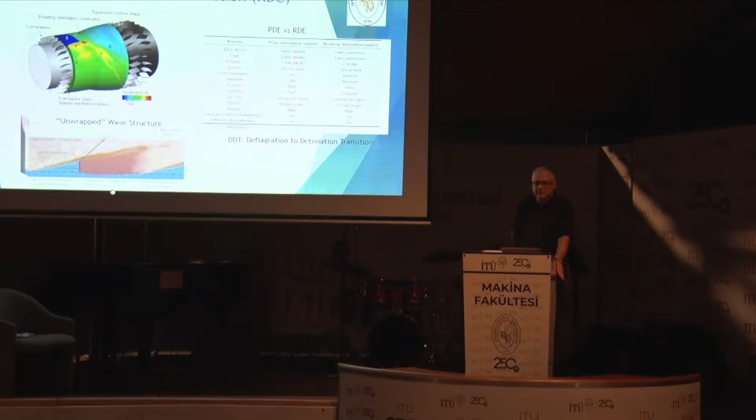Kompresörde sıkıştırılan hava Rotating Detonation'la türbine iletiliyor, yine aynı makalede şöyle bir yorum var: bu yanma odası çıkışındaki çok karışık, heterojen akış düzeni, çünkü oblik şoklar geliyor arkadan, slip line geliyor vesaire. Tam olarak nasıl oluyor, bunu iyi açıklayamıyorlar, itiraf da ediyorlar. Ben orada şunu sormak istiyorum: yine aynı makalede bu etkileşimlerle çalışacak bir türbin öyle kayıplara sebep oluyor ki küçük çaplı turbojet motorlarda bunu geliştirmek feasible çıkmıyor sonuç olarak.

İki tane şey var. Şimdi bu pressure gain combustion yaptığın zaman, daha önce anlattığım gibi burada frekans düşük, bam bam bam bam diye gidiyor, 80 mesela 60 filan. Bu buraya geliyor, buradaki nozzle'a bam bam bam vuruyor bir kere, ondan sonra bu nozzle onu alıyor, ondan sonra blade'e transfer ediyor. Orada çok büyük kayıplar meydana geliyor.

İkincisi bunu cool etmen lazım. Cooling nereden gelecek? Kompresörden gelecek. Ama kompresörün yarattığı pressure buradaki pressure'dan az. Ne olacak? Bir tane booster compressor koyacaksın. Extra complication, ondan sonra bunun kayıplarını hesaplayacaksın.

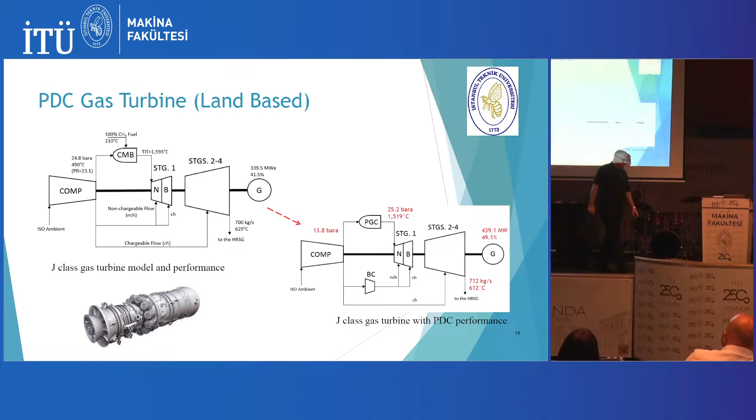Tipik olarak mesela normal bu makinalarda birinci stage turbine stage efficiency total to total 90 civarındadır. GE bunu yaptığında, bunun şu paper vardır, bak şu resmi aldığım paper. Bu büyük ihtimalle sende vardır, yoksa ASME konferans paperlarında şey yaptıklarında bulursun.

İki tane zorluk var. Bir, NOx emissions ne olacak? İki, parts life nasıl olacak, mesela kaç saat çalışacak? Şu anda genelde bu makinalarda major outage, turbine outage 32.000 saat, 64.000 saat, onlara bakıyorlar şimdi. Bu şekilde çalışan bir şey gitmez büyük bir ihtimalle, o kadar.

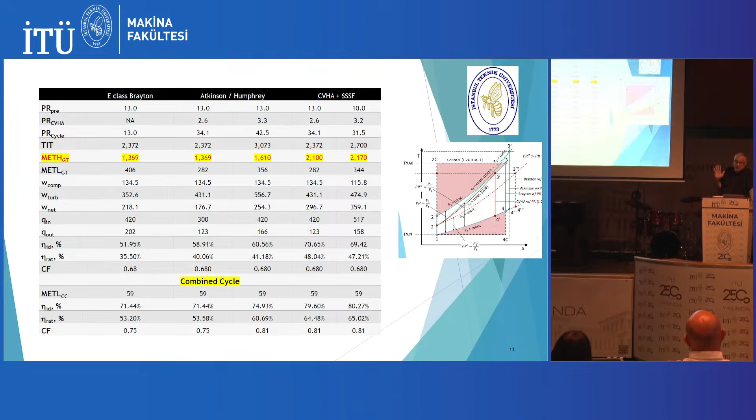Ne olacak o? Zaten dediğim gibi on paper efficiency advantage, combined cycle muazzam, bir E-class firing temperature'la 65% elde edebilirsin hesapla. Ama bu sebeplerden dolayı orada çok büyük belirsizlikler var, ulaşabileceğin 2 ila 4 percentage point. Still very large yani, işte rotating detonation'ın saving grace'i.

Çıkışta operating frequency çok yüksek, o azalıyor, intermittency'nin getirdiği şeyler. Ama birincisi pulse detonation kadar pressure gain yaratamayabiliyor, çünkü Chapman-Jouguet wave velocity'leri yapamıyorlar. Niye yapamadıklarını da açıklayamıyorlar, hatta bu paper'da da yazıyor, diyor ki Chapman-Jouguet velocity achieve edemiyoruz, the reasons may be this, that, etc., bilinmiyor.